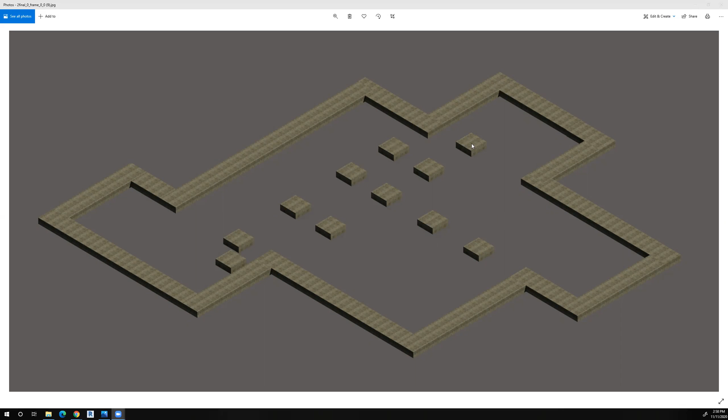And if you look closely here, you can see the brick ledge. When we made our stacked wall, we had a 12-inch concrete wall to here, and then we made that an 8-inch concrete wall because we needed a ledge for the brick to sit on. And that was what we called it. We called it a brick ledge.

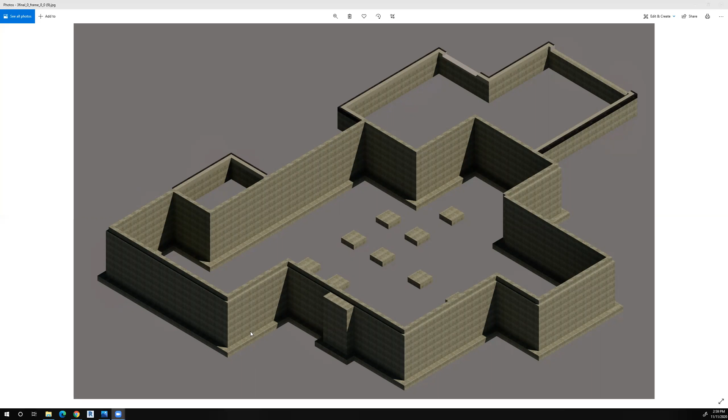So after the forms are removed and the concrete walls are in place, the earth is filled back in between the larger opening of the earth and the actual wall of the basement, so that tradespeople can step from the ground right onto the project, and there's not a big void space all the way around the house. So the next step is the columns and beams are placed.

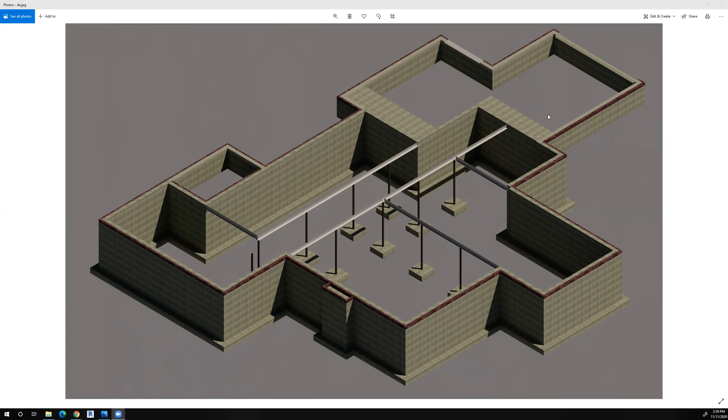Now the beams, we placed our beams underneath the load-bearing walls above. We're transferring the loads from all the way at the top of the house from the roof to the load-bearing walls, and underneath those load-bearing walls we place steel beams, and those steel beams are supported by steel columns, generally 3.5-inch round steel columns underneath that. And that would be step one, is that the steel beams and the steel columns have to be put in place.

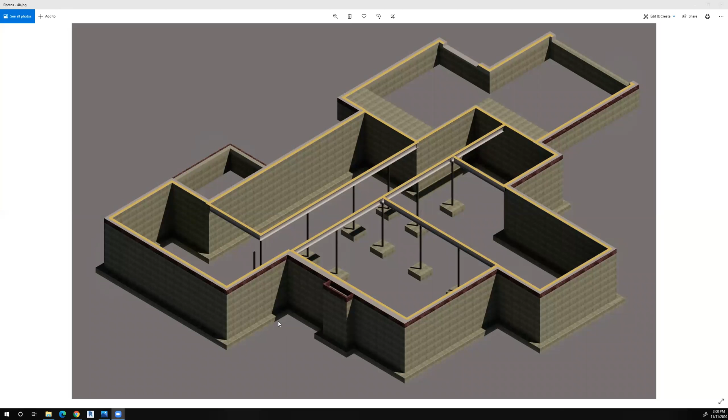And then on top of that, the framing crew, the carpenter crew, come in and they put a sill plate all the way around the house and on top of the steel beams, so that they have some lumber to nail their framing system to. And this starts to look familiar to you because we put our rim joists all the way around the house first, and then inside of those rim joists, we put our structural framing, depending on which way we chose to span, to show the span.

Now you also see that there are some things that I call ladders underneath certain parts of the building. Wherever there's a wall above that is parallel to the floor joist, we have to double the floor joists underneath it or provide ladders. I call that ladders anyway. And that's a framing that supports the wall above and transfers those loads to the floor joists on both sides. And the reason is that that wall can come down and not sit on any kind of structural member, and it's just sitting on the plywood, and the plywood is not capable of supporting the weight of the walls above, possibly, so we put these ladders in.

The other thing that we can do is double the floor joists underneath the walls above, but if we do that, it makes it difficult if you want to get some kind of ductwork into the walls above. If you have double floor joists underneath it, then there's really no space to put ductwork, to get ductwork from a lower level to an upper level. So the laddering really works better, and that's my personal preference.

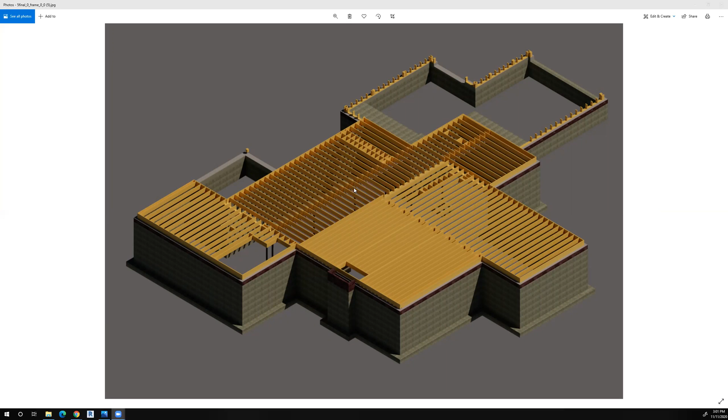The next step after the floor joists are put in is the plywood floor goes in. Carpenters put the plywood floor in, and remember, we cut openings for what?

For the stairs, so there wouldn't be any framing or plywood subfloor there. And the next thing that carpenters would do, they would put in their first floor studs inside of the walls that we have determined where we want them to be.

Now, wherever there's a large opening for a window or for a door, we have loads coming down, but there's nothing below that because it's glass and it's not able to carry any load. So we have to put headers across there, which allow us to transfer the loads that are coming down to columns on both sides or underneath our headers.

And so this is essentially what your framing would look like. You're not required to do that in this class, but it gives you an idea how your walls will be constructed. And if you start thinking about that, it can be very beneficial to the construction process.

You also notice that there are some pieces of lumber about halfway up some of these walls, and that's simply a fire stop, so that if there was a fire in this cavity, for example, it wouldn't be able to travel all the way up without being slowed down by these fire stops. And so that's an important element for the actual construction as well.

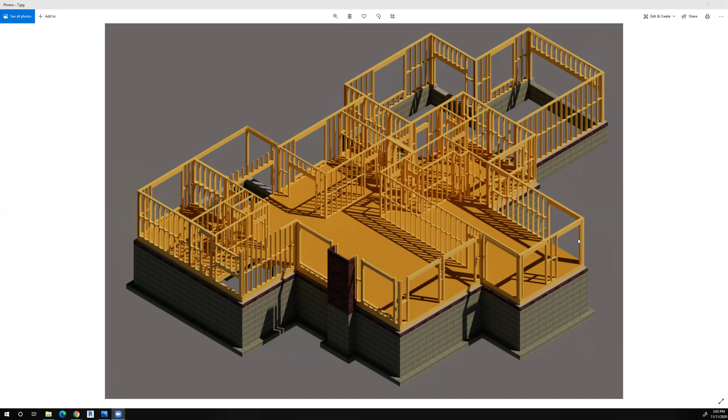So the carpenters have now got their first floor walls framed in, they've got their openings for their windows and for their doors. And then the next thing that they would do is put the second floor framing on. And again, you can see we have our beam coming across here. That's what we put in. And then we put our framing inside of our beam areas. And then you can see some more laddering areas here and here.

So wherever there's a wall that's parallel, we would double joist underneath it or put these ladders in to carry the weight, because the wall sitting on plywood only wouldn't have the ability to transfer the loads. The plywood couldn't carry that weight. But when your walls are perpendicular, then these floor joists are actually carrying the loads of the walls above. So we would put that in.

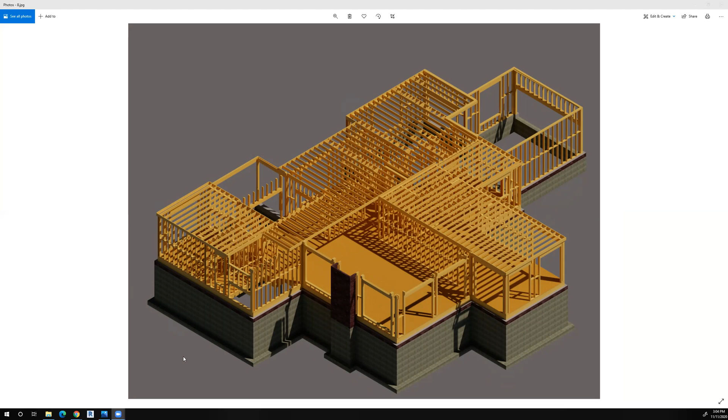And the next step the carpenters would do is they would put that plywood subfloor on top of their framing below. And you can see, if you look real close here, remember, we put our beam in flush with our plywood subfloor, and the carpenters built that beam on the first floor. Then they come in and they nail down the plywood subfloor.

Now I ask them to nail, glue, and screw. So they have to do all. They have to glue the plywood, they have to nail the plywood, and they have to screw the plywood to the framing below.

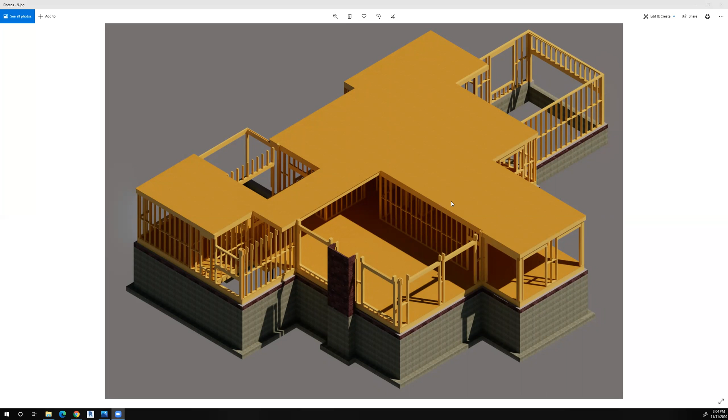And then the next thing that the carpenters would do is put in the framing for the second floor. And as you can see, the framing for the second floor is quite similar in concept to the framing in the first floor. And then once that's finished, then they can put the roof on top of that. So just a little demonstration for you with respect to the way that the sequencing is in your project.

And think a little bit about how these components are actually going to be constructed in your project. It might help you on making a decision on where you're going to put walls and doors and openings and things like that. But this might have been more helpful at the beginning.

Unfortunately, I'm building a demonstration model for this class, going through it step by step, and I just got to the completion of the framing of the model. But again, you're not required to do this framing on the inside of your walls.